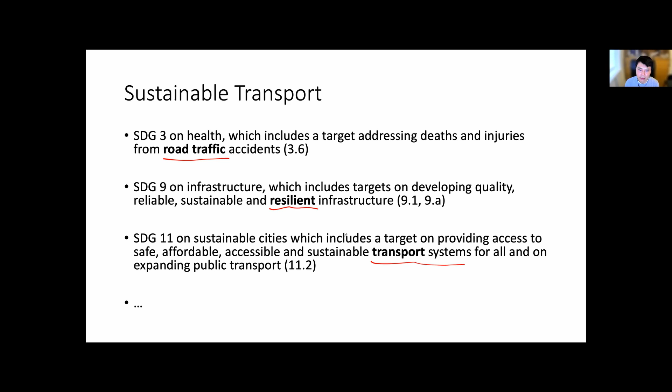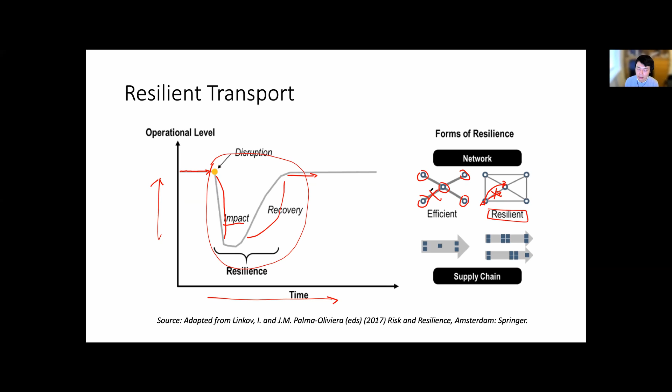So this is the second interesting example to show you how resilience is important for designing a good transport network. Okay, so knowing about the fundamental concepts of sustainable and resilient transport, let's look at what is the problem of the existing urban road traffic. The first problem is the emissions problem.

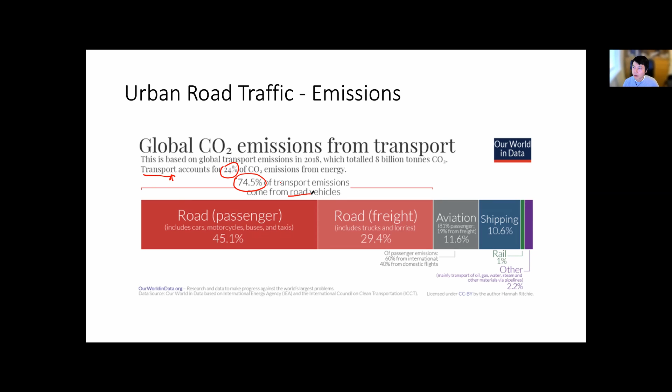So out of all global CO2 emissions from energy, transport accounts for almost a quarter, and out of all transport modes, nearly 3/4 of the transport emissions actually come from road vehicles. So that shows how important it is to reduce the emissions of road traffic in order to achieve the sustainable development goals. The second problem is the safety problem.

These are not very up-to-date statistics, but from these two tables you can see that out of all transport modes, rail, air, ferry, and road, road transport accounts for the highest percentage of deaths per 100 million person kilometers, and also per travel hours.

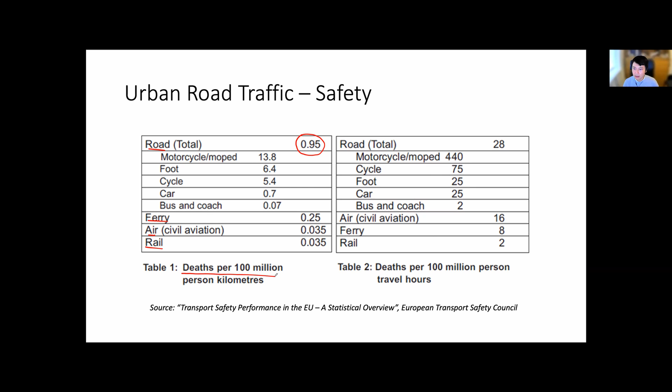So it is dangerous actually. And the third problem of designing the urban road traffic is how to alleviate congestions caused by en route events. So we're talking about these types of congestions.

It is unlike the recurrent traffic congestions that happen every day due to daily commuting, because that kind of congestion is predictable using big data and AI technologies. These kinds of congestions, such as this temporary road closure, are difficult to predict. And once it happens, it really needs a very timely response, to achieve a higher resilience level of the whole transport network.

Okay, now, before we go into details about connected autonomous vehicles, let's look at why traffic waves happen. This is a very interesting field experiment in which you will look at this ring-shaped road. All the cars are human-driven cars, one followed by another. At the beginning, the gaps are all evenly distributed, but after a very short amount of time, because of the delayed human-driven behavior response, you can see the gaps become unevenly distributed.

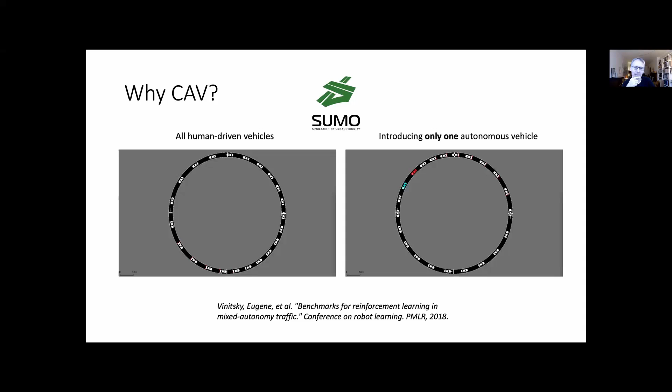So one thing I wanted to ask about that, you showed this great little video footage of the cars driving in a circle, and that was human driving. Was that actually a simulation of humans driving? Was that the SUMO humans, or was that actual people in real cars? Now, if you go back one more slide. Yeah, that's a real car and real human. They're real cars and real humans. Brilliant. Yeah, I love that clip.

That's very funny. And you can see the cars are actually different. I noticed they're different sizes, but I couldn't figure out if it was just computer graphics or if it was real. That's fantastic. And you can also Google Scholar this; the paper is a very well-known study. And you can find a lot more details about how they pick the different human drivers, but still keep a well-representative driving behavior level of human.

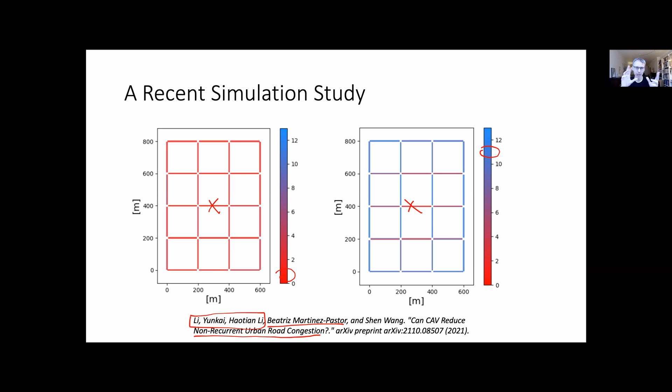What we did here is, after we close one road, the vehicles that are supposed to go through this road will recompute their routes only according to Dijkstra's algorithm, which chooses the shortest distance route. Which means that you can use Google Maps, but you cannot use Google Maps traffic. Okay. Excellent. That's what I was wondering, how much of the Google Maps prediction of where the traffic goes would be in this. But if you don't have the traffic on it, then it is a much simpler vehicle routing problem. That's great. Thanks.

I just had one more question. I really liked your graphic explaining the difference between making an efficient road network and making a resilient network.

Presumably cost needs to be taken into account here at some stage. Do you have any idea how people make those decisions? So if you have to make a resilient road network, you need to physically build more roads. Do people do it just to increase resilience, or do they just kind of naturally grow to be more resilient?

For these kind of things, I think maybe it's better to forward your question to my colleague Beatriz. She's an expert in building resilient transport networks. Because I'm from the School of Computer Science, my research focus is trying to use ICT methodologies, information communication technologies, to make the existing road network react to this sudden change of traffic more quickly.

But in terms of rebuilding the whole network, I think it requires a lot of investment. So I think people from the civil engineering area have more specialized tools to simulate it, and also they have their own channels to communicate with authorities and companies who want to make this investment.

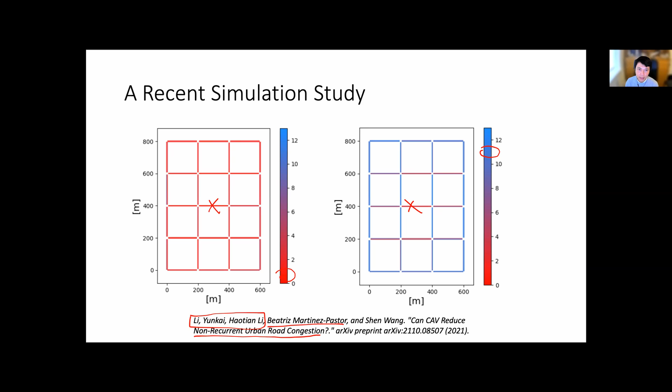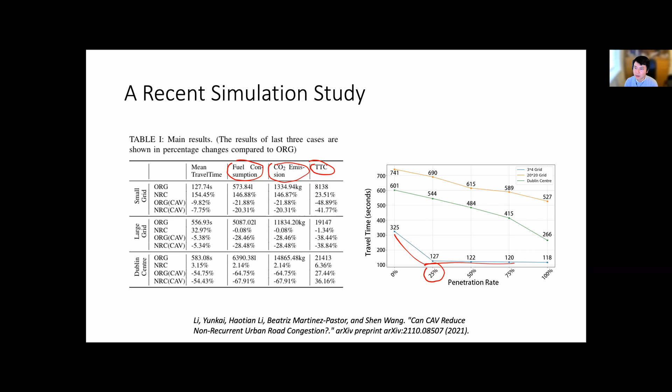Very good question. So in our early stage simulation study, we use a car-following model to mimic level 4. So all CAVs we consider here are level 4 autonomous level. For level 5, to the best of our knowledge, we haven't found a good simulation model to do that. But maybe for level 5, it is even more complicated because you need to gather a lot of information, visual or non-visual, happening in the surroundings of the cars to make decisions. But level 4 is achievable now in SUMO. Yeah, we use level 4.

Great. Liz Bruton has a hand up. I'm not sure, do we need to allow people to speak, or? Oh, I think that's fine. Yeah, Liz, if you're there.

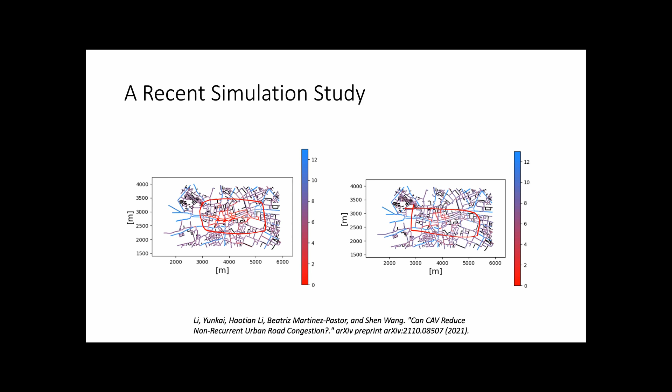No, really, really interesting presentation. I was just wondering, in terms of your simulation for bridge closure in Dublin, does it assume that suddenly they close and the number of human-driven cars on the road is exactly the same? Or does it factor in things like human behavior, i.e. if you announce that 3 bridges in Dublin are closing tomorrow, the number of people trying to drive into Dublin significantly decreases? Yeah, very important question actually.

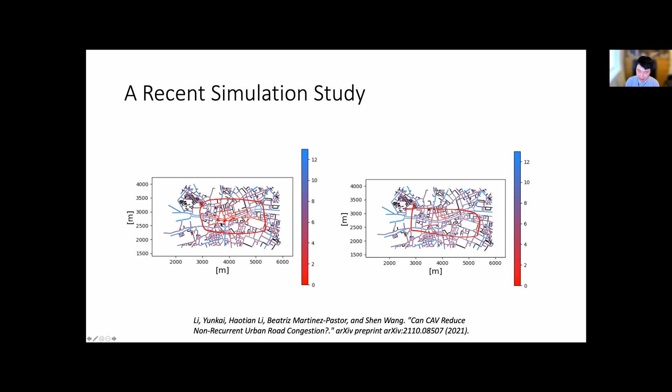So what we did in this simulator is that it has a way to mimic what's happening in real life for rerouting. We put a sign like this, and from the time that we put this sign here, the cars that are already on the roads that are going to be closed still can go, but the cars that need to go through have to reroute. And we don't simulate the scenario where we announce one day before, because that's kind of a predictable situation, which does not suddenly happen on the road and does not require a very timely response.

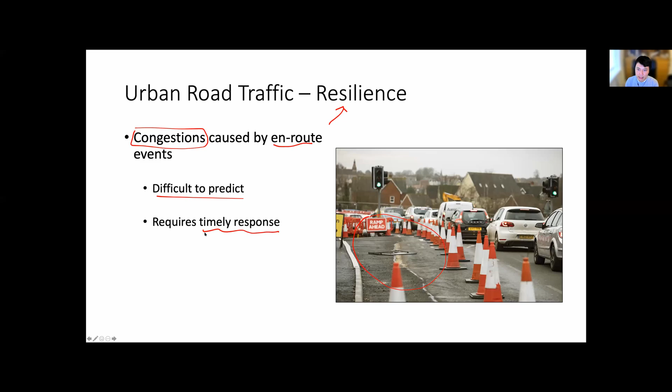So, you know, for CAVs, the connected vehicles, with the existing communication protocol, the slowest update frequency is 10 times every second. So this is the kind of timeliness that we want. But for a one-day announcement in advance, we can still use some big data or AI technologies to try to avoid that, using Google Maps, for example.